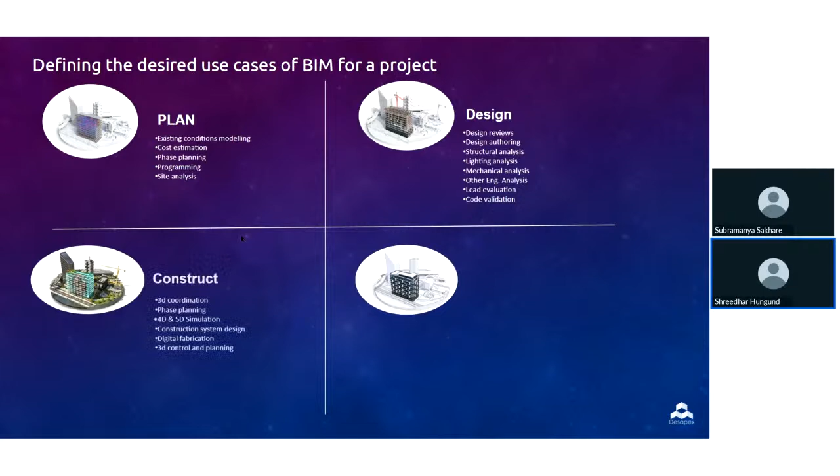Of course, use cases of the project could be, you could be using BIM for only planning, or you could be using it for design development and construction documentation, or using the same BIM model for further 4D and 5D simulation, or digital fabrication, or even 3D control and planning, or further move ahead to taking the further dimensions of BIM for operations and facility management.

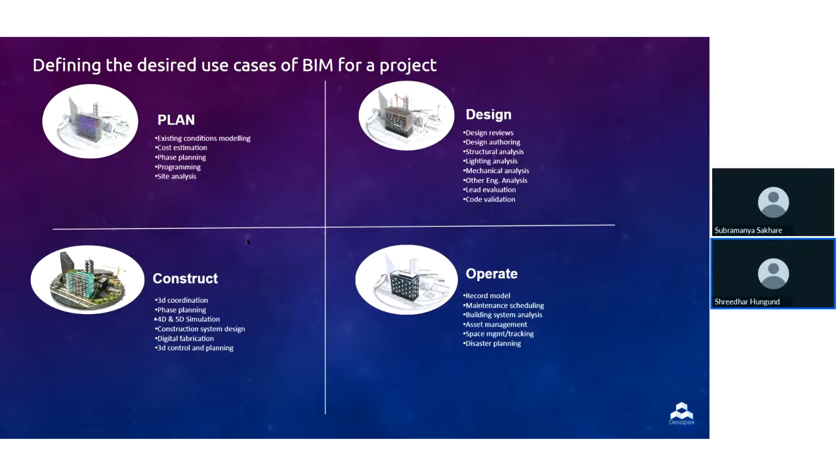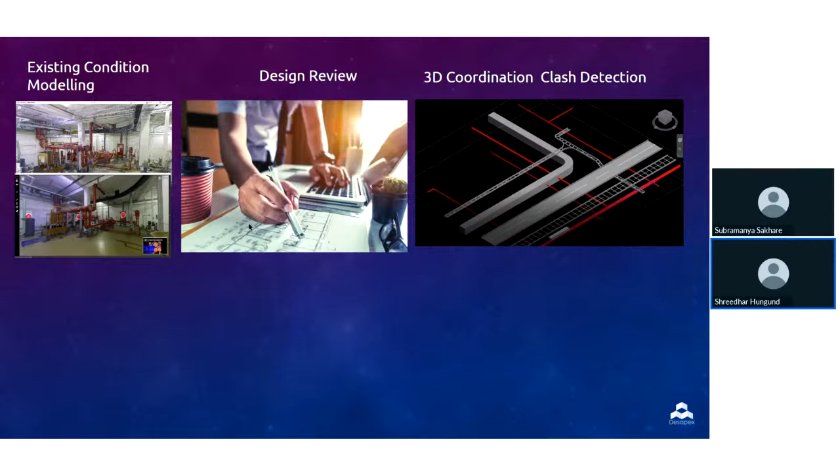So whether it is existing condition modeling or design review or 3D coordination and clash detection, construction documentation, phase planning or asset management, you identify those requirements on the project and let your prospective bidders know that these are the areas of interest, and the methodologies and protocols that they would be using to achieve this would be documented.

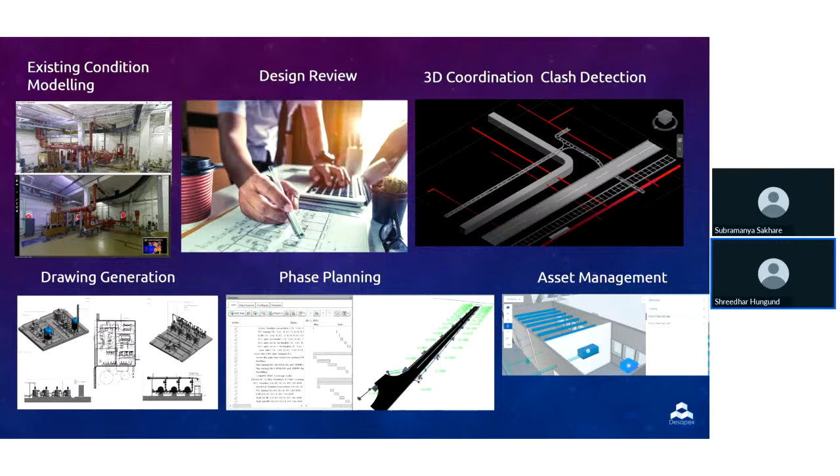Also, another critical aspect that most people confuse or misunderstand here is that this is only limited to the owner and, let's say, a primary design consultant. But no, this framework is applicable to each and every engagement or appointment on the project, as termed in the standard. So whether it is to appoint the main design consultant by the owner, or the design consultant further subcontracting this to specific subject matter experts for different systems design.

If we take an example of, let's say, company A being a single point of contact for the entire design development deliverables, but company A has in-house architecture and interior design capabilities, but they appoint, let's say, company B, which takes care of the structural design development, and let's say company C and D for special process piping, or let's say MEP consulting, and the overall responsibility still remains with company A. It's a lead appointed party in context to these subcontracts.

So irrespective of whether it is the design consultant being appointed directly by the owner, or the individual subcontractors that this design consultant takes care of, all of these individual appointments or subcontracts would need to be developed in the same order as we saw now, that is setting up the EIR, exchange information requirements, and how the collaboration between you and that further subcontract needs to happen. So the same is applicable to any appointments that are done during the construction or the design development phase. So it continues to implement as such.

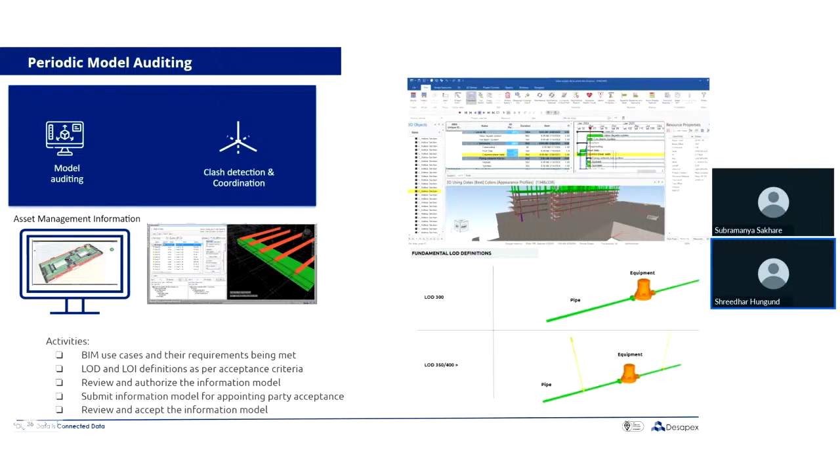Once this periodic model development and authorization is completed, and the overall project reaches closeout or completion, you archive the project information model into an asset information model, used for handing over to the operations team. The requirements set out for how this information model would be used for asset management are verified and validated, and then you compile the lessons learned for this project so you can use it for future projects.

So now we have seen the entire framework of ISO 19650, and how right from the initial assessment of the needs on the project, by developing so many documentation and looking at information requirements more critically, we've set up the common data environment, what are the milestones, softwares, data exchange formats, responsibility matrix, and acceptance criteria and intended use cases of the project using BIM.

And of course, moving further into developing an EIR, that is an exchange information requirement, then further to tender response by developing a BIM execution plan, getting that approved, and developing a final BIM execution plan. Of course, BIM execution plan is a live document which gets updated every now and then, when there is a significant change or impact on the project.

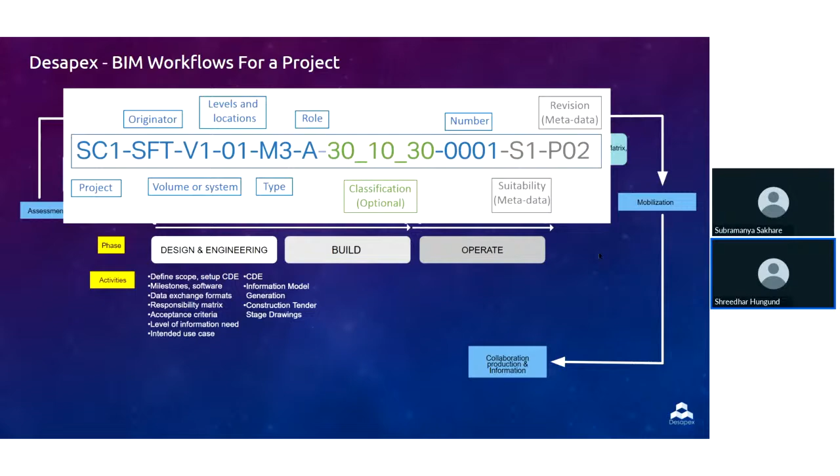We further proceed to mobilization, and then develop information as per the approved nomenclature or definition of file naming convention, and then follow the CDE process for a collaborative production and exchange of information.

Of course, down the line, you could use many different digital engineering technologies like augmented reality, virtual reality, to enhance and increase the collaboration. There is no definition, or let's say limitation, on what you can use or what you should use, but rather a framework of how you can enhance your information management process through this standard is what ISO 19650 defines. You're free to use different methodologies or different technologies to streamline a certain aspect of your project delivery.

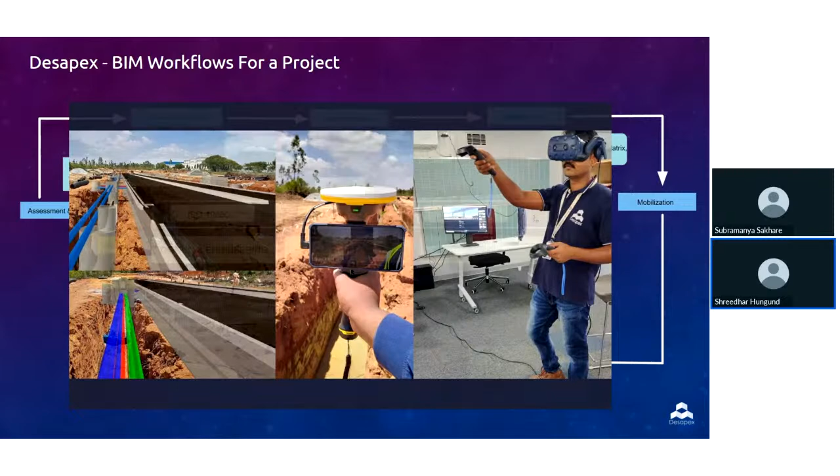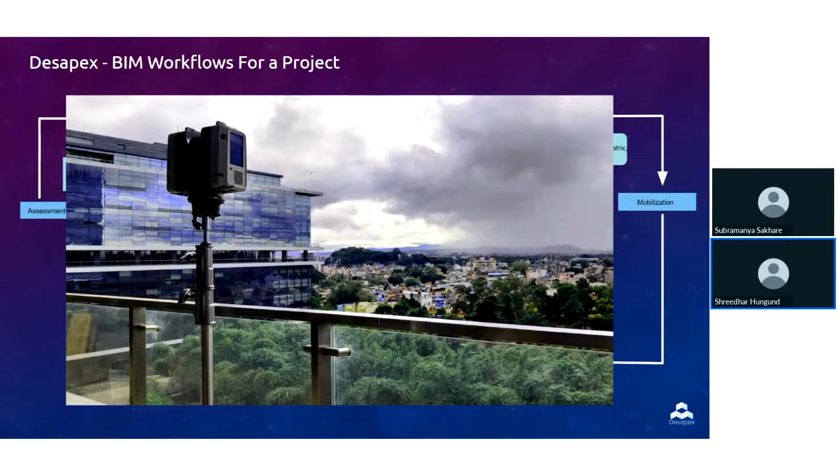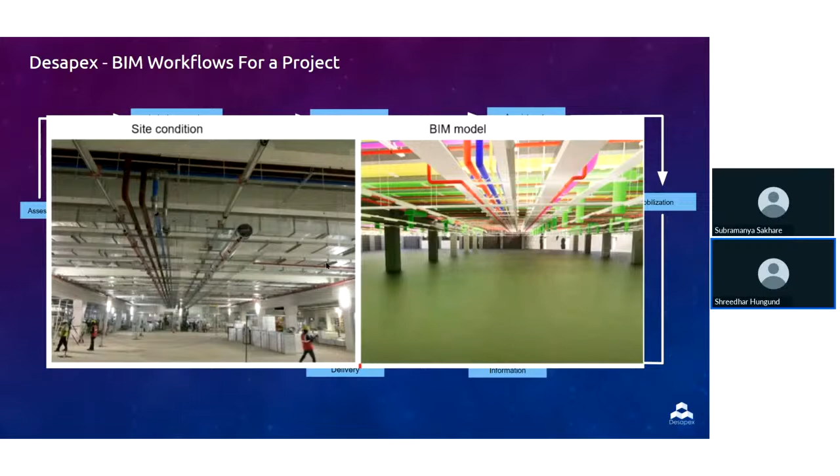Of course, using 4D and 5D simulation for your virtual design and construction analysis, then using reality capture and laser scanning activities for validating as-builts and handover, or even construction progress monitoring for efficiently managing construction activities, and then as-built validation and handover for the operations phase of the project.

And then further handing over this to asset management, where the same project information model, which is now an asset information model, is containing the relevant information related to facility management, and allows the user or the owner to use that for day-to-day operations management on platforms like Granlund Manager. It's our own computerized maintenance management solution that we offer to our customers.

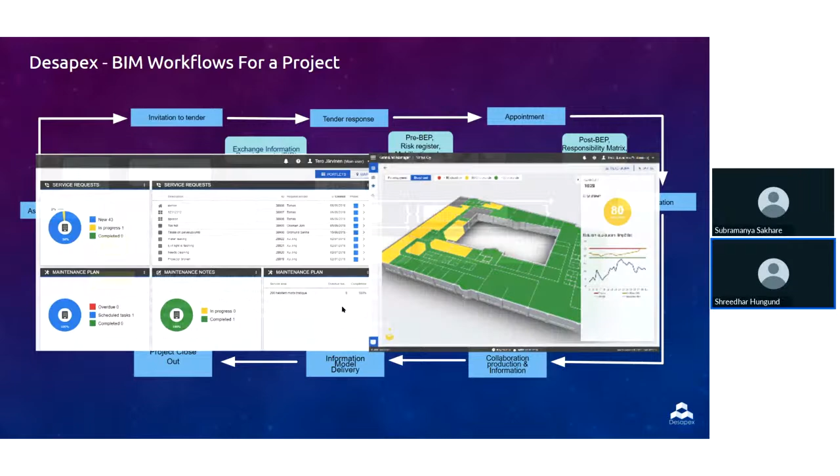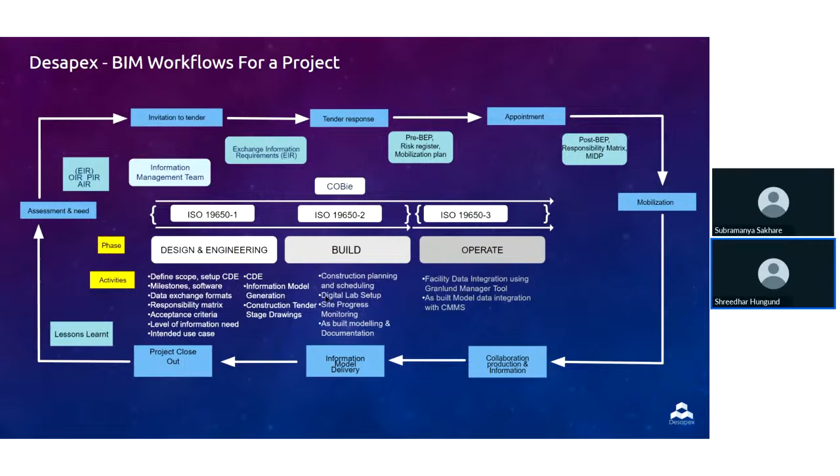And then, of course, compile the lessons learned to complete the critical positive and negative experiences on the project, so that the positive ones occur again on the project because of their positive impact, and let's say reduce or not occur in your next projects because they had a negative impact. So documenting those lessons learned is a critical requirement on this standard.

So we've seen these aspects which are critically identified and listed, where even the smallest of the small things that would normally be considered, or let's say, why would we need to tell which software or which file format we are submitting this in - some of this information might sometimes seem silly, or why should we write it in that detail? But defining those in such detail allows you to bring an impact in increasing the overall efficiency, that allows you to manage your projects better, and enhance the collaboration, allowing more collaboration between architects, engineers, contractors, and other stakeholders to work seamlessly together.

And with consistent information being developed, and aligning with the quality of design and construction requirements, you have that assured quality deliverables that could even reach or exceed the performance expectations on the project.

And of course, since this is a holistic approach to design, construction, and operations aspects being discussed right from the beginning, you have a more streamlined management of all of your processes that allows you to gain more operational success, and a happy end user on the project, right?